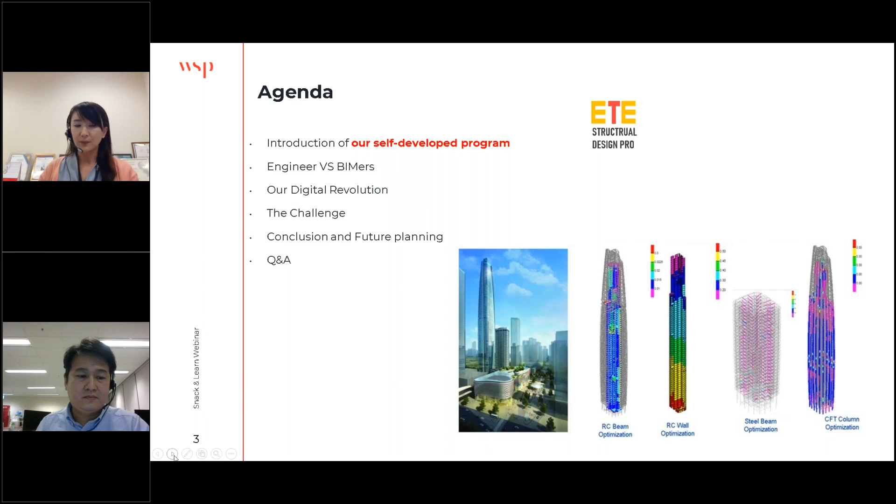What we are going to introduce you today is our self-developed structural tool called ETE. It's a series of software including structural analysis, section analysis, foundation design, and drawing automation that helps our structural engineers obtain the best solution and automatically generate drawings within just a few clicks. The current ETE analysis can run on Eurocode, Hong Kong code, and China code.

With our ETE, it helps to minimize the calculation time and the communication time between the engineers, the draftsperson, and the modeler. It also reduces the production time as well.

In the past, we used to start with ETABS and Excel to analyze the loading behavior, then enter the load into other detailing software as a complete set of calculation. At last, you would draft the framing and RC details and pass it to somebody for 2D CAD or 3D model. This all includes back and forth communication, which can take ages.

Since the development of BIM is fast growing, most of our engineers start drafting directly using Revit, then work on collecting the loads in ETABS. With our ETE, you can also start with modeling the framing in ETABS and use ETE to obtain everything. You can start either way, and it works too.

Here you can see there are 26 BIM uses suggested in Hong Kong by the Hong Kong Construction Industry Council. Actually, our BIMers or draftspersons have a lot of chances to get involved in our digital transformation by working on this aspect.

It may sound very complicated, but we do have a few videos to show you how it will be transformed in a very short period of time. So please stay tuned, and I will now invite Dr. Dino Chen to talk about the series one by one. Thank you.

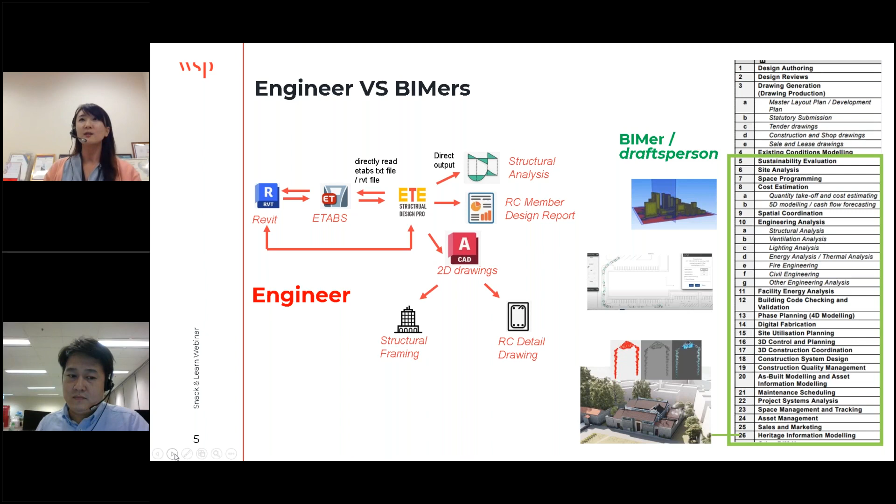I'm trying to explain the ET system. ET system includes a structural analysis and design tool we call ET Structural, and we have a small tool for complex section analysis called ETE Section.

These two parts are for structural analysis, and we also have another tool called ET Foundation for foundation design. According to Hong Kong Wind Code, it's very complex, especially the calculation of wind load. So we invented ET Hong Kong Wind, a tool to compute complex wind load according to Hong Kong code. It considers the shelter effect, so we need the building information around the project to calculate the wind load.

We also have ETE GI Inventory, which can directly connect to the Hong Kong CSDI. We call it the common data bank of GI data. We can use this data to form the geotechnical information, for example bore log information or rock profile for our foundation design.

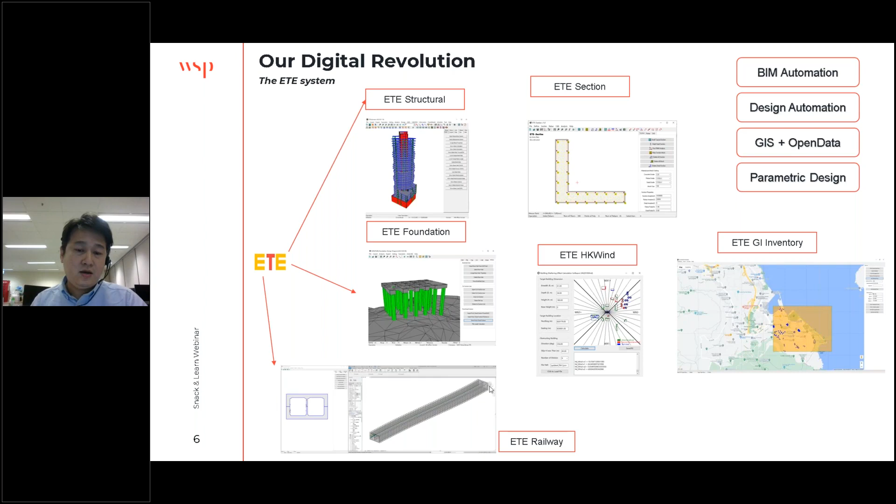Recently we have a tool called ETE Railway. It's a BIM automation tool that can produce the railway model in BIM format and in Revit program. All together we call it ETE. This is the whole system. We just want to have a BIM integrated tool for engineers to make design easy and reduce production time. So we focus on structural design first.

Structural design in Hong Kong is a very complicated procedure, from the prelim design to the final construction stage design. At the very beginning, nowadays we have the CSDI data bank. The Hong Kong government provides all the AGS files of the GI data bank to the public, so we invented GI Inventory to connect and directly transfer this data to form the GI data.

We can use this GI data to form the rock profile and soil property, and we use ET Foundation to capture this data and transfer the foundation model to a SAFE file. Another software belongs to CSI - this program can run a lot of different types of foundation analysis. We use this program to produce information for our in-house software called ET Foundation. Using ET Foundation, we can produce foundation drawings, Revit models, and foundation calculation sheets.

This part is for foundation, and the other part is structural analysis. We have the ET tool - I will show you in video, but let me first introduce the basic function of ET nowadays.

ET can generate the model from ETABS model, and it can also generate the model to Revit. Also, you can use the Revit model to generate the model in ET, and all models can transfer between different software based on ET. ET has a user graphic interface for users to input very complicated information like the beam mark, column mark, and beam column information - much more complicated than the current ETABS model.

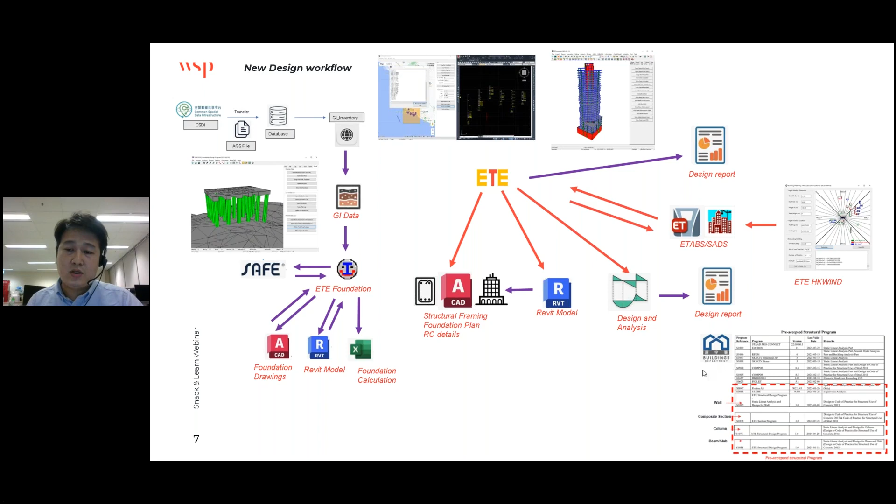By ET calculation, they can run the gravity analysis and directly output the design report of every component like beam, column, and shear wall. They can also generate the model to ETABS, or if the model is run in ETABS, you can use ETABS to capture and run the gravity analysis or wind analysis and transfer the internal force data to ET, then let ET run the member design, like beam and column design, and generate the report for our submission. Nowadays in Hong Kong, because members are mostly designed based on Hong Kong standard, we already have approval from the Hong Kong Buildings Department confirming all the calculations are correct.

This is the whole process. This graph conveniently shows how to transfer the model from ETABS to Revit. Usually on some projects we have very talented engineers who can build ETABS models very fast, so we use ETABS to build a model and transfer it to ETE. Sometimes we have Revit models from the architect, so we can use Revit to build a model instead.

Both ways are okay. ETE can also transfer the model to our Hong Kong standard design software called SADS. Also, ET can combine a lot of functions and plugins from AutoCAD.

So we can generate a lot of drawings, such as structural framing and RC detail drawings. Also in Hong Kong, each element like column, beam, shear wall or slab needs an individual calculation report for each member, so we can use ETE to generate all the member design in PDF. This saves a lot of time—if we didn't use ETE, we'd need to run a lot of Excel to produce this calculation. Nowadays we use ETE to automatically calculate, even optimize, and then generate the final manual design report.

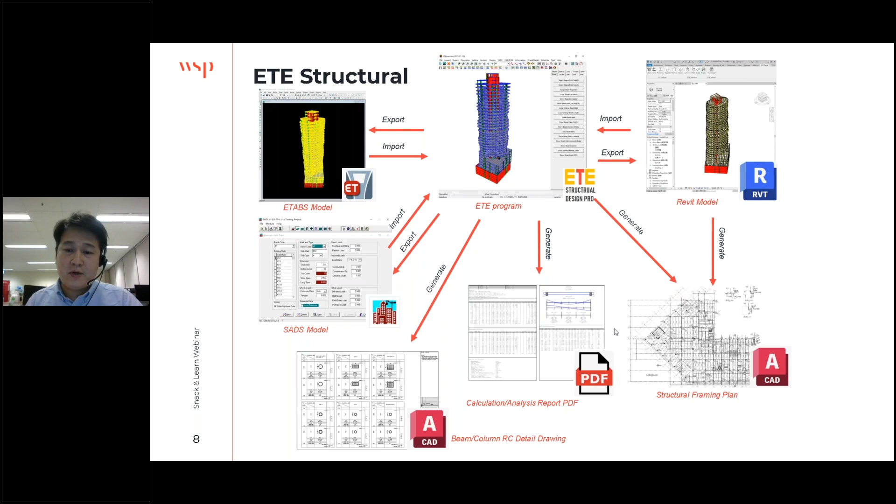Because we need to integrate with BIM, we already developed a plugin for the Revit program. It's written in C#, an embedded plugin, or what Revit calls an add-in. This add-in is based on ETE theory. It can generate a lot of different members from ETE, and if we have the Revit model, it can generate the model to ETE to run other analysis. This is the BIM integration function of ETE.

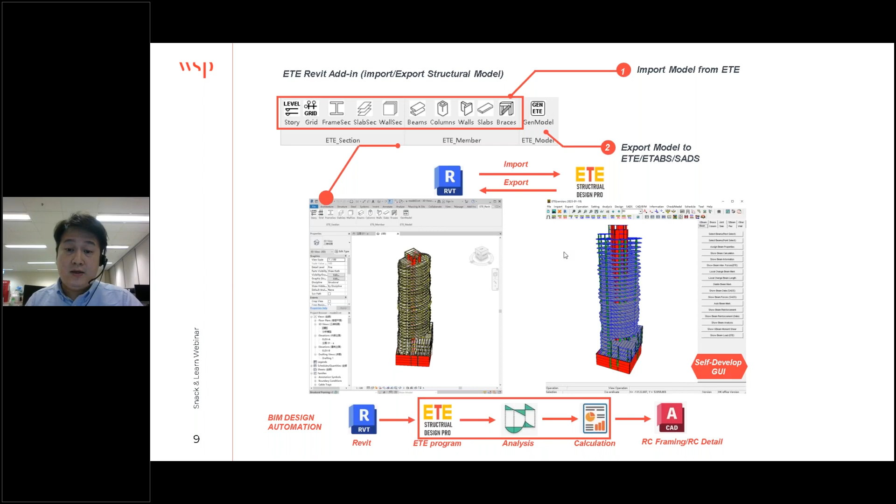So I have some video to show the whole process. You can see this video.

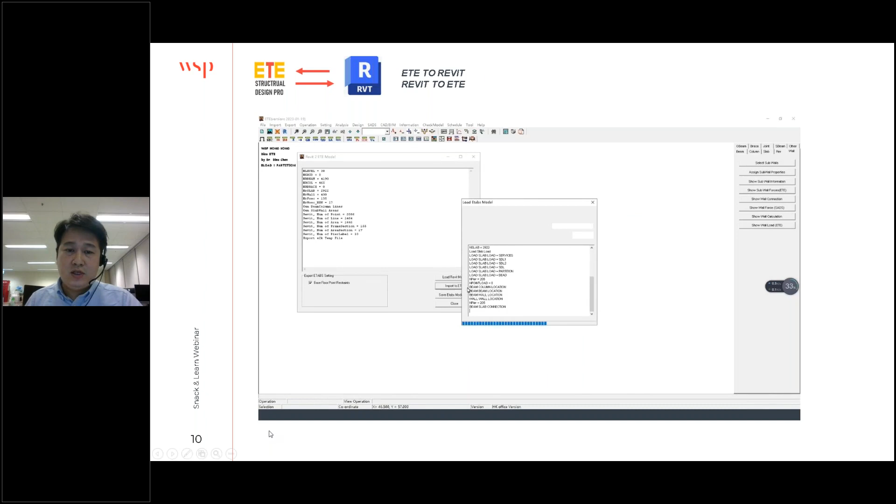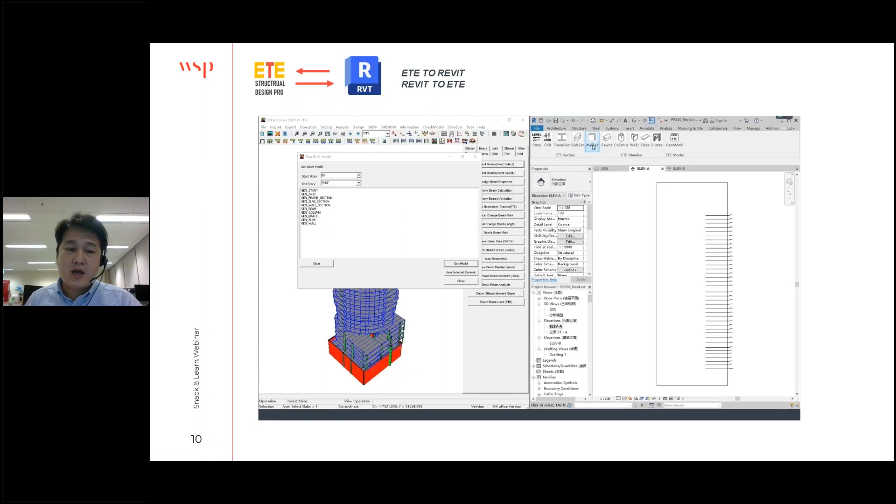At the very beginning, we just import the ETE function—sorry, this one here. We have the Revit model, we can transfer it to ETE. In ETE we have our in-house software with a GUI, graphic user interface, with a 3D interface, and we can input a lot of information. Also, if we have the ETABS model, we can import it to ETE and then import to the Revit model. So it works both ways, okay.

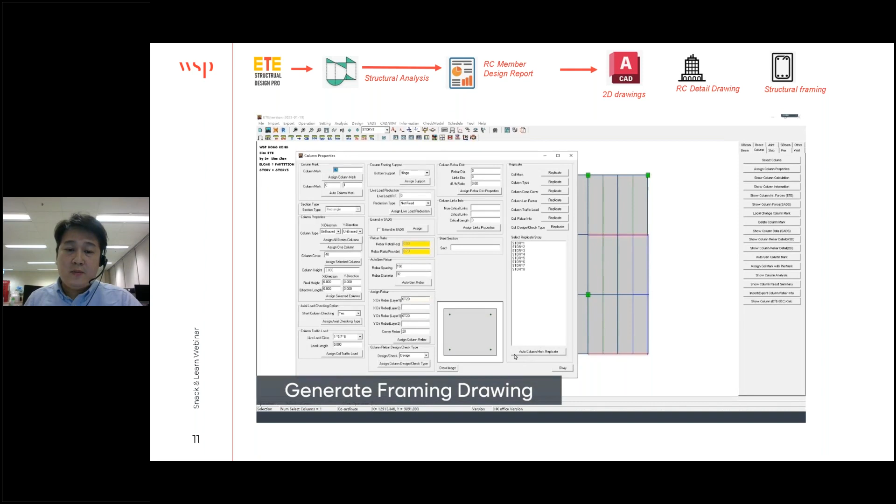The other function that's very powerful for our submission is the design function, including the RC detail and framing design. For example, I take a very simple frame structure. This function generates the framing drawing—it just needs one click, and it generates the framing drawing in the certain format. The other one is the beam. For example, this column RC detail is generated from the result calculated by ETE.

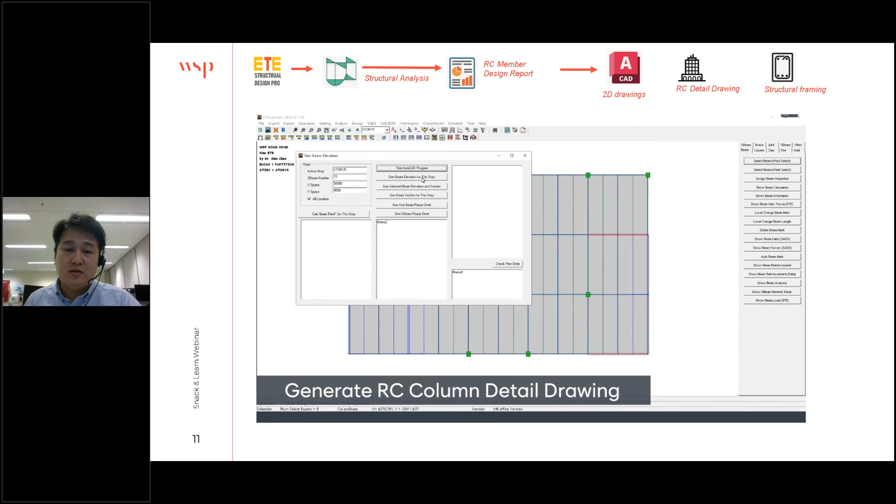The most complicated one is the beam RC detail. In Hong Kong we need to draw the beam elevation and the section, so we use ETE to produce this complicated beam elevation. All the data, the rebar area or rebar length area, comes from the calculation—it is matched together. So this is the combined model, the single source of the output.

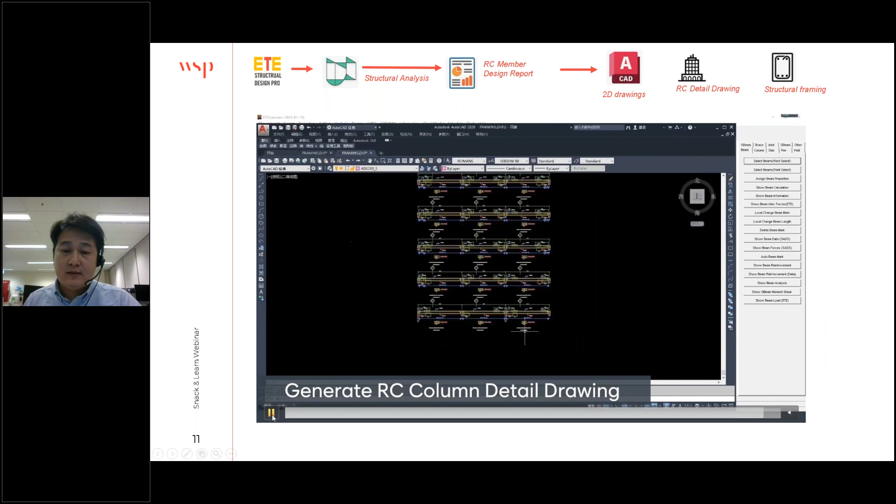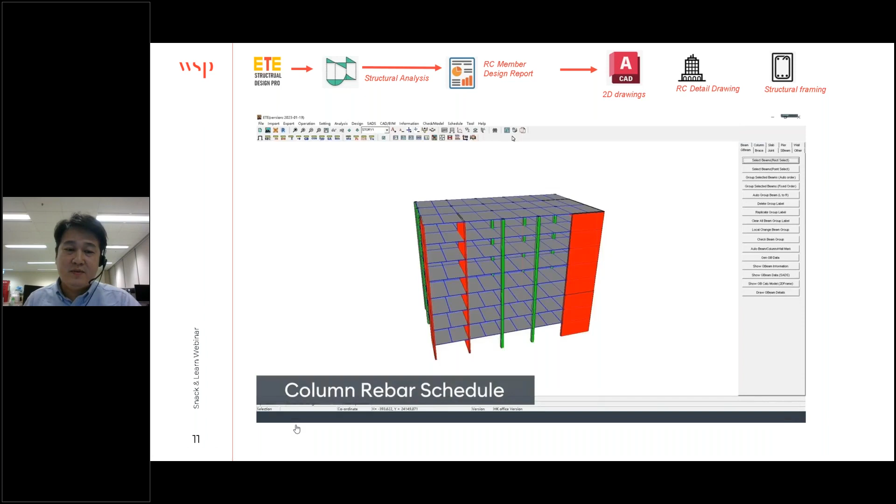If there's a real structural model, it would take a long time to generate this drawing, so I picked up a very simple one. I took one project to estimate how much time we can save for one project—a hospital project. In this project we needed to produce 461 pages for the RC beam detail drawing, because for every beam you need to draw the elevation and the section, requiring a lot of manpower.

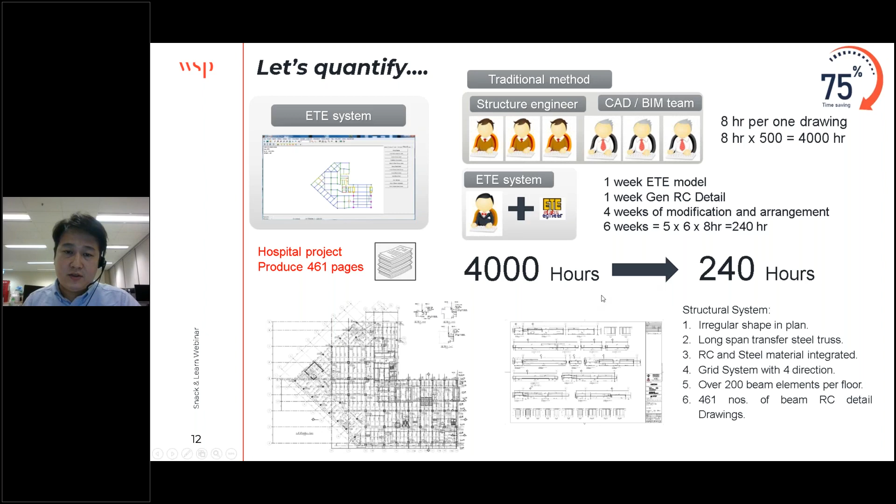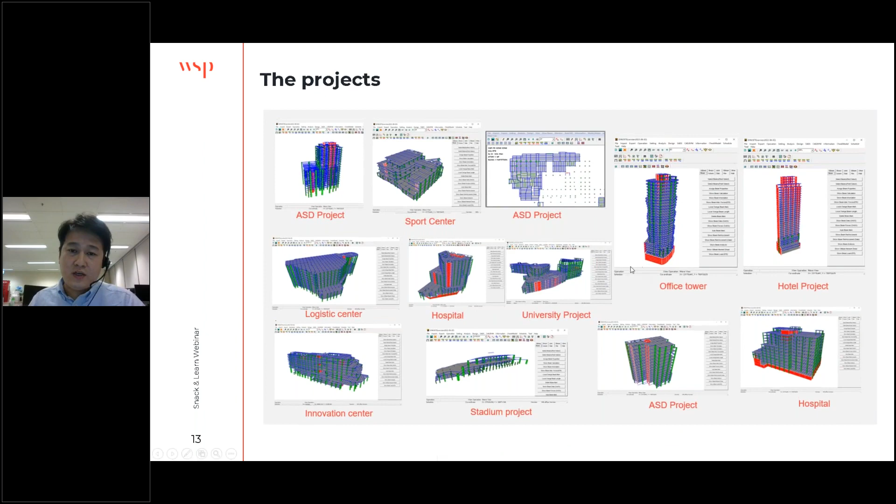This part is the introduction of the ETE structure only. Now I have another introduction of other software included in the ETE system. One is the ETE Section—a powerful tool which can run a very complex section like composite section analysis. It can draw the section in AutoCAD and generate the 3D PMM curve. Nowadays this function is already embedded in the ETE structure, so you can use the ETE program to analyze the complex section.

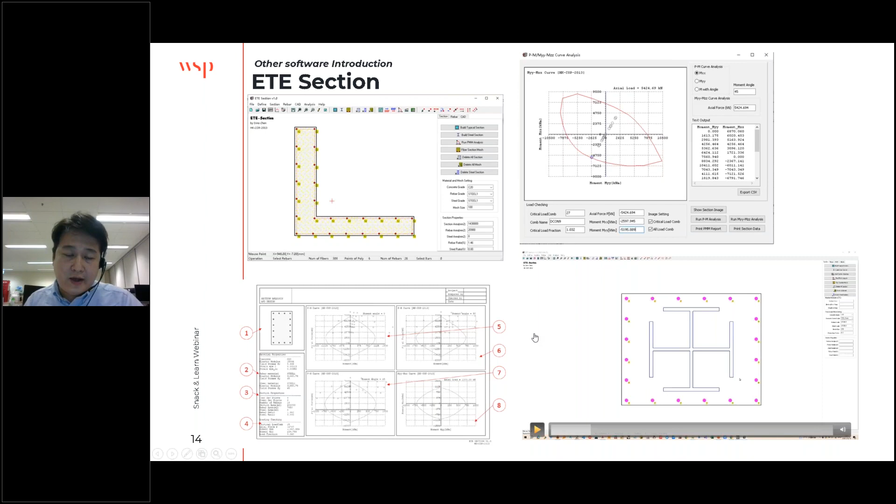The other one is the ETE foundation. It connects to software like ETABS or ET—they can generate the column and wall force, and then you can import it to ETE foundation. We also have our graphic user input, and according to Hong Kong code, we need to build the pile spring for each pile. It's a very complicated model in SAFE, so we use ETE foundation to generate the model to SAFE. We can use ETE foundation to optimize the pile length, and import the soil property or the rock head profile from other software.

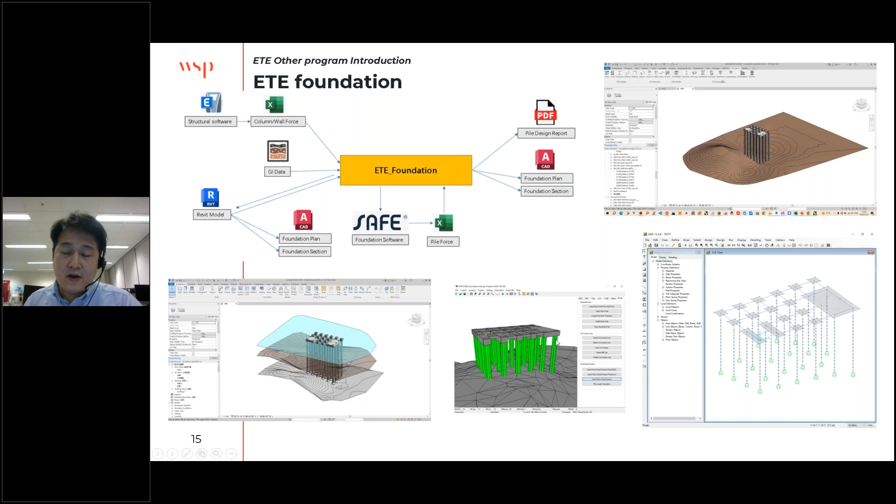And this is GI Inventory. GI Inventory, as mentioned before, connects open data from the Hong Kong government to provide geotechnical information for the boreholes dug before. We can connect this information for our foundation design or slope analysis.

You can see that it can generate the CAD drawing directly. In the future, maybe we can generate some Revit model for the bore log or the rock head profile.

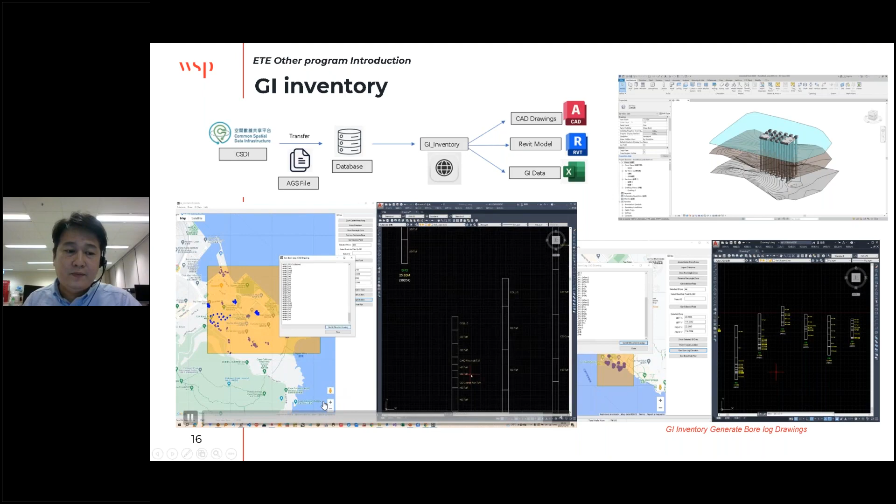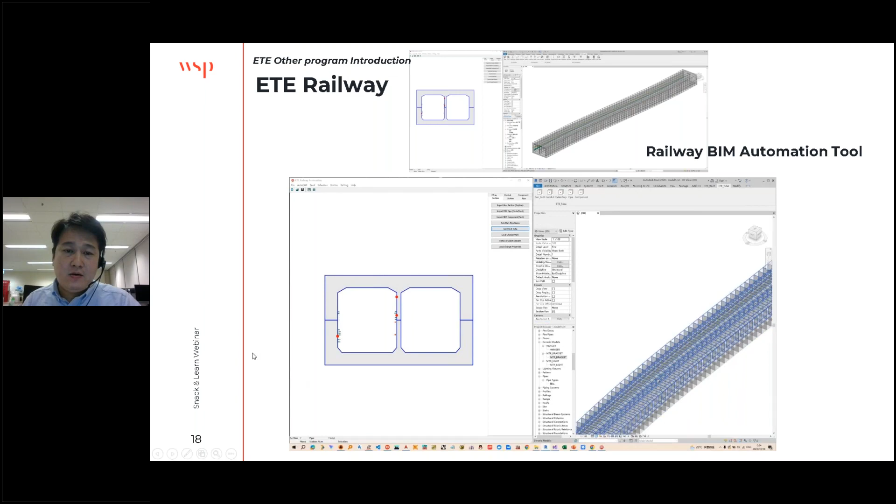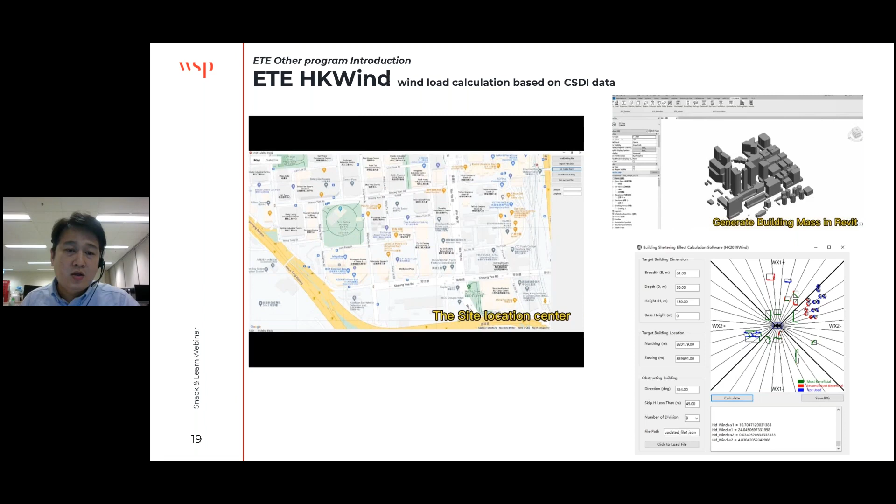Hong Kong wind load is very special because it's a local wind code. We need to consider the shelter effect, especially for high-rise buildings surrounded by other high-rise buildings, to reduce the wind load. So we need a very precise surrounding building model. We use Hong Kong open data to capture the information of the surrounding buildings, and then we use our in-house software called ETE HKWind to compute the wind load for each direction. This is how we capture the information from the CSDI into our Revit model, and we can use this Revit model to compute the wind load.

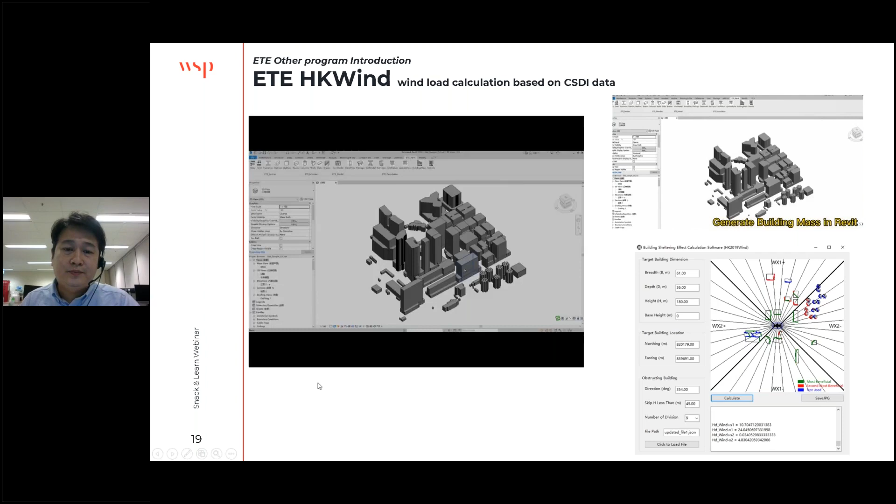So next chapter is about the challenge. I'll share some feeling or idea about the next challenge, because especially this year, ChatGPT technology and AI and machine learning technology is very fancy, especially for some architecture or CG experts. Nowadays they use a lot of AI and machine learning to produce architectural drawings, in just one minute or several minutes - you press one click and it can generate a lot of different schemes. This is for architecture, but...

Fortunately for our structure, there is no AI or machine learning program like ChatGPT or other programs that can auto-generate the structural scheme or the structural drawing. But I think in the future there must be such an item. But we need to face this challenge.

We can see that nowadays, like BIM integration and automation, especially parametric design, Grasshopper is developing so fast nowadays. So it's a challenge, or it's a chance for us to catch up, and we can use this as a tool to minimize our man hours and increase our efficiency for the production of structural design.

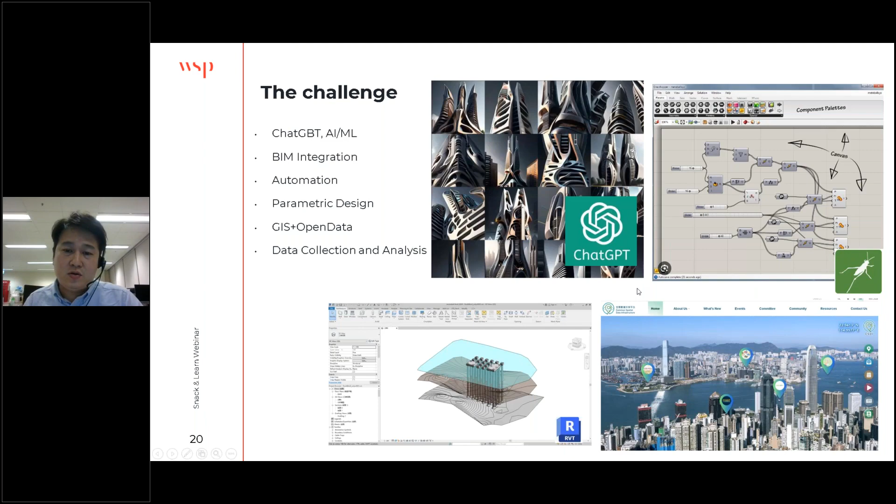This is also called data collection and analysis, because now we can use the data, but we cannot use the big data. When we call it big data, we need to collect the data and use machine learning algorithm methods to analyze the result. I think this is the challenge for the future, so we need to focus on this technology.

For the future development of our ETE system, we can see that this year we used the ETE Structural software to develop a redevelopment, using the same theory but transferring it to another issue to run foundation analysis. So we invented ETE Foundation. It has the same architecture in the software, but we can use it for different aspects. You can see that in WSP, there are a lot of aspects, not only structure and foundation.

Also, we have bridge, tunnel, traffic, environment, and geotechnical, and sometimes MEP like drainage. We can also use the ETE technology to invent new tools to automate design and analysis, especially to produce drawings, because the drawing and the model are our main output of engineer design.

In the ETE Structural program, we have BIM automation, and this automation tool can also transfer to another aspect. Recently we have ETE Railway, which uses the same architecture to produce the railway automation tool. You can see it in the introduction.

GIS plus open data. In Hong Kong, we understand CSDI has a lot of data, but we don't understand if other countries or companies like WSP have wonderful open data we can try to use our inventory to connect this data. In the next stage, maybe we'll have a traffic inventory to collect our WSP traffic data. This is a very powerful tool for the future.

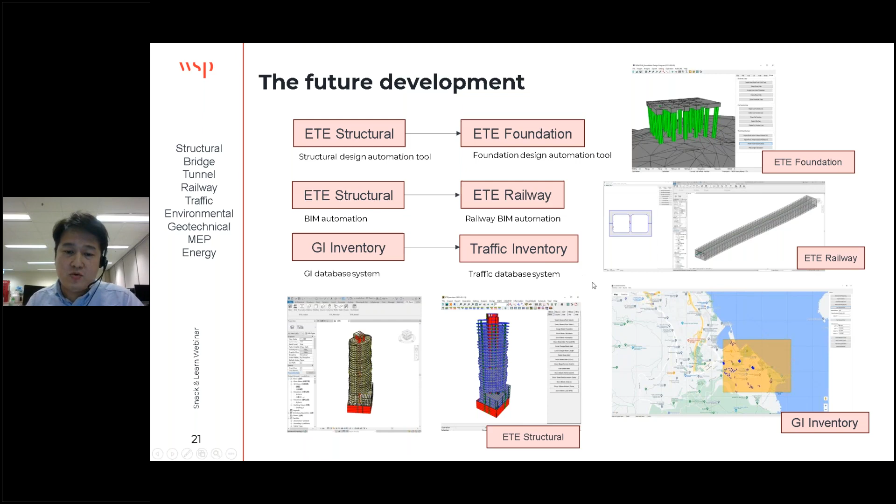Nowadays, traffic data is separate for each zone, so we cannot see the connection. But if we use the traffic inventory with a big data analysis method, we can find traffic problems, or find solutions. This is the future development of our ETE system.

Okay, I think I finished this part, so I hand out to my part to Cecilia. Cecilia will answer some questions from you.